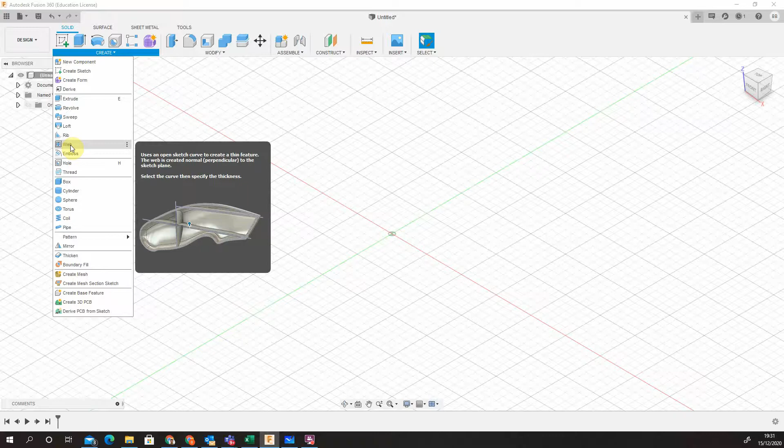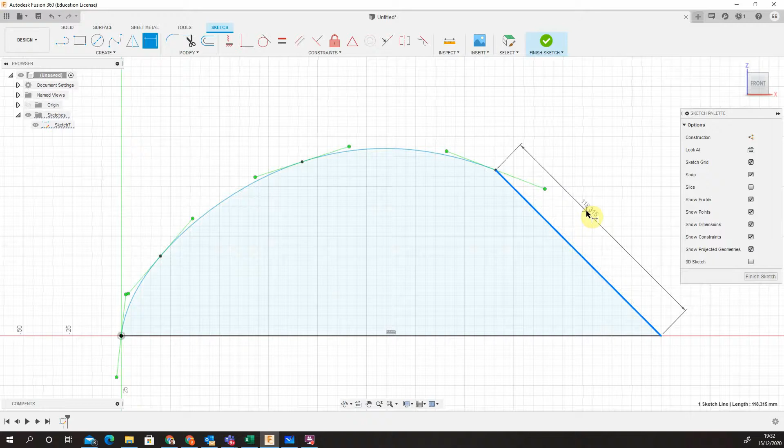This is like a Stanley knife blade holder, so we can make a nice web kind of tool. We're going to start a sketch on our front view, and do a nice sort of arc shape, then finish it off with a straight function. So we're just going to apply some dimensions - 118 is fine, just to give you a feel.

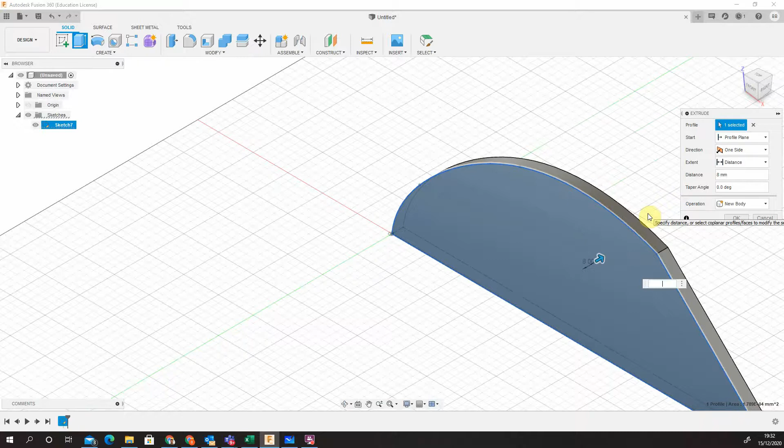So to put a web in, we're going to need to shell out our space, leaving 1.5 mil of wall thickness. So it's 1.5 mil - it's like a big sort of bowl or container at this current minute in time.

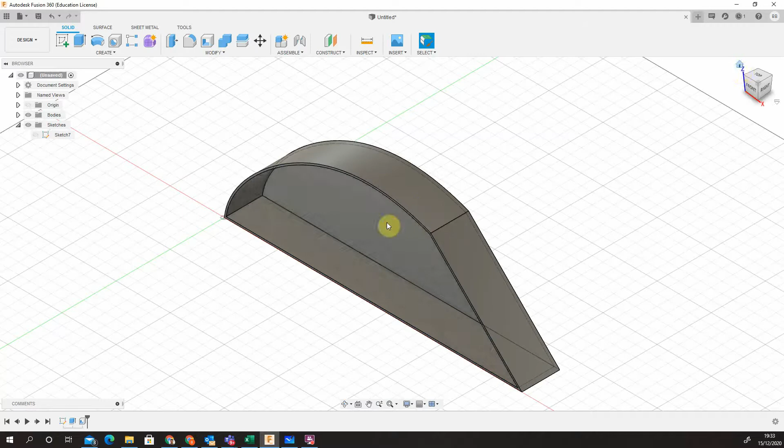To do the web, I'm going to draw on the front plane. I'm going to turn sketch 7 on, because the first thing I want to do is copy the profile. So I'm going to copy paste this profile using Control C and Control V just to copy that profile around.

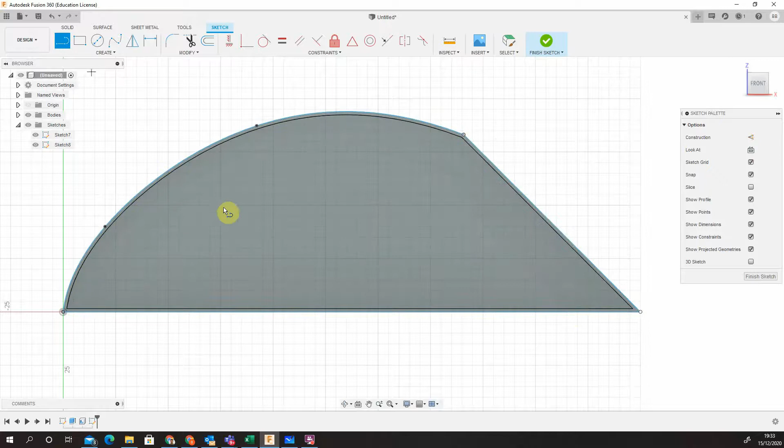So I'm roughly going to find the center, which is here - that's the center of my shape. So now I'm going to go to rectangular pattern.

One direction. Let's do minus 100 just to get it to flick the other way. Symmetric, there we go - so we could do 200.

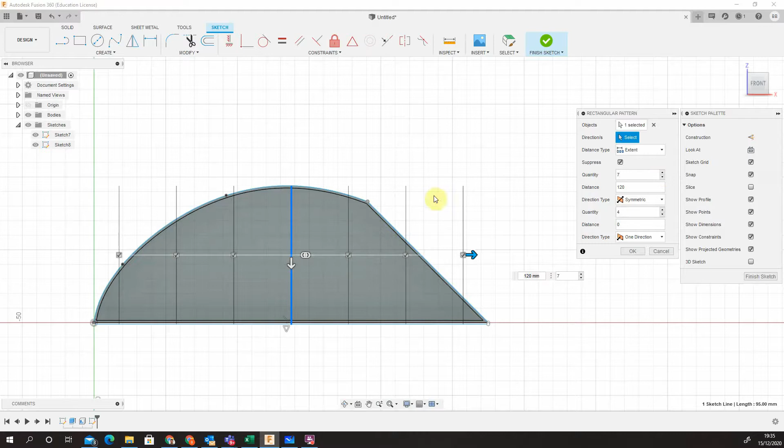So that's 120 mil distance. Just do 100 because that second one doesn't really need to be there. That'd be fine, it's 100.

So we now input that in. Now what we can do is, because we copy and pasted, we can just trim off those functions against our shape.

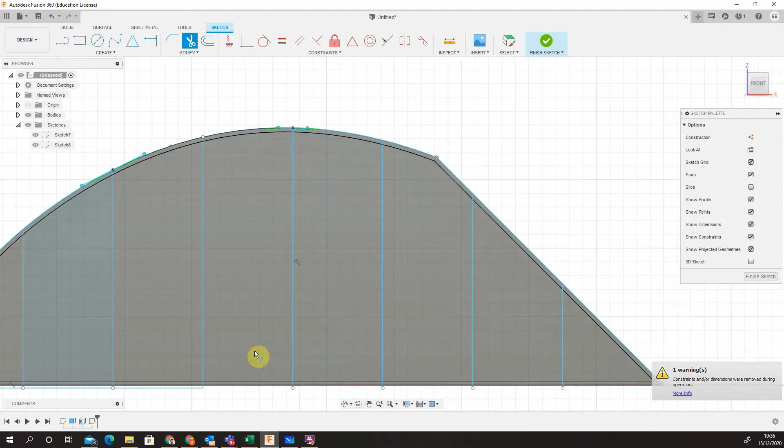Okay, now what you want to do is trim out any enclosures. You don't really want to make any shape, otherwise it will web around the whole shape - you just want your lines.

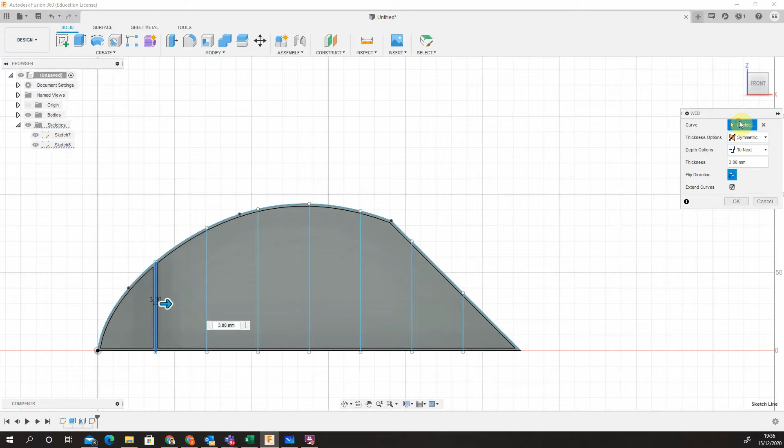Now we can go into the web function, finish the sketch, into the web, choose our webs, 1, 2. If that's a 0, I can select them all. And if I put 3 mil, I can put a web that way, so I'm quite happy with that web there.

So we've got a web across, now I'm going to spin it, and you can see then the depths there as well, and the whole way through.

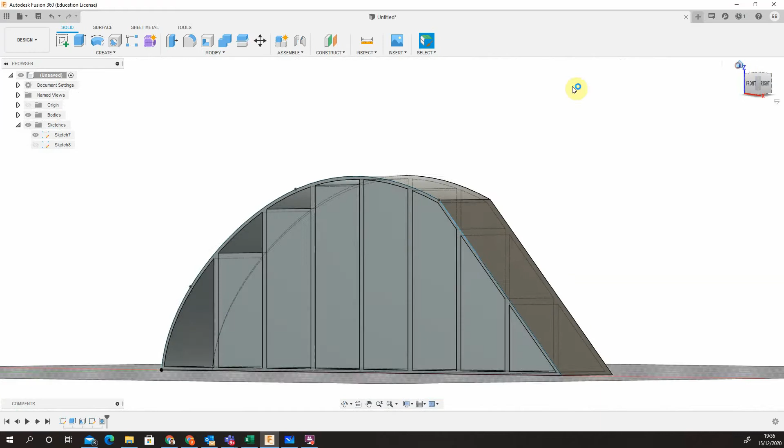So now again I can come along another sketch on my front plane. I can then do my other directions. I could sort of say I need a web now, sort of along the centre.

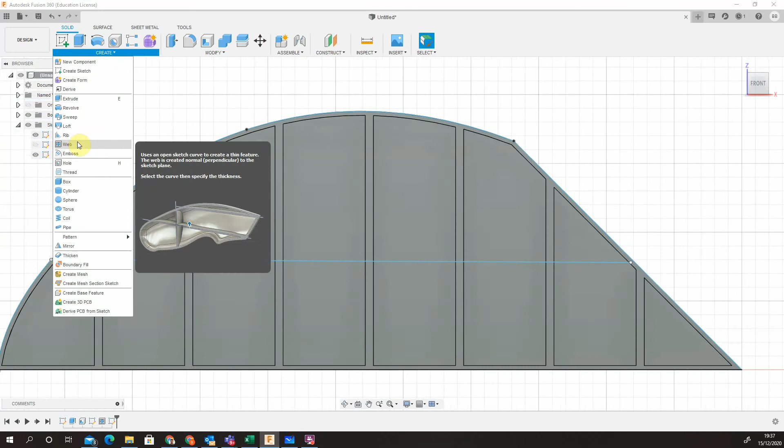Finishing the sketch, come on, make another web. Again I could do another one, 3 mil, like so.

Now I've got quite a nice reinforced structure that I could 3D print, machine, or pocket out, whatever I wanted to do. But that's basically how to use the web function within the system. So next we'll look at some more of the how-to series.